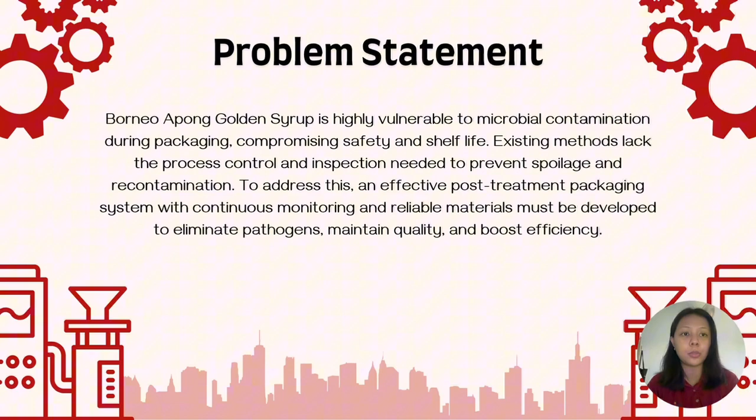Borneo Apong golden syrup is highly vulnerable to microbial contamination during packaging, compromising safety and shelf life. Existing methods lack the process control and inspection needed to prevent spoilage and recontamination. To address this, an effective post-treatment packaging system with continuous monitoring and reliable materials must be developed to eliminate pathogens, maintain quality, and boost efficiency.

Objectives are to design an affordable, practical, semi-automated post-processing system for small-scale production, to ensure consistent operational conditions to reliably eliminate targeted pathogens, to integrate seal quality control to prevent post-process recontamination, and to align the solution with UN Sustainable Development Goal 9.

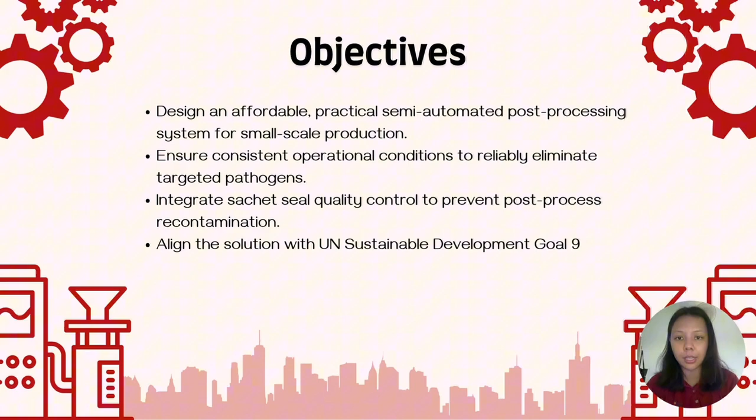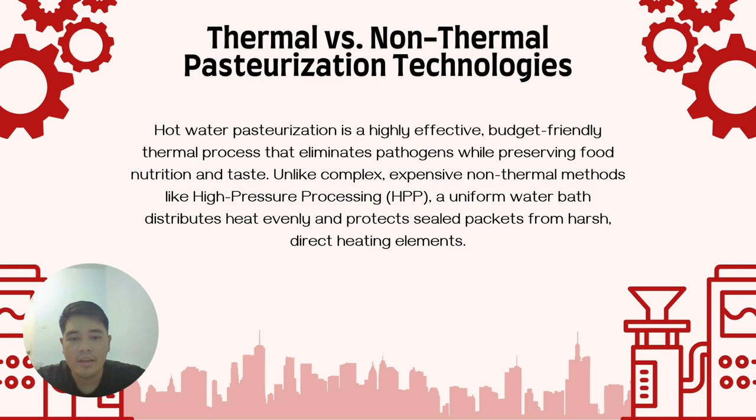For literature review, thermal vs non-thermal pasteurization technologies. Hot water pasteurization is a highly effective, budget-friendly thermal process that eliminates pathogens while preserving food, nutrition, and taste. Unlike complex, expensive non-thermal methods like high-pressure processing (HPP), a uniform water bath distributes heat evenly and protects sealed packets from harsh, direct heating elements.

In terms of microbial contamination and process validation, raw gula apong syrup's low pH 5.6 and high moisture promote dangerous bacterial growth, such as E. coli and coliform. Because temperature readings alone cannot prove complete disinfection, rigorous quality control and sample processing are required to confirm pathogen elimination and validate the system safety standards.

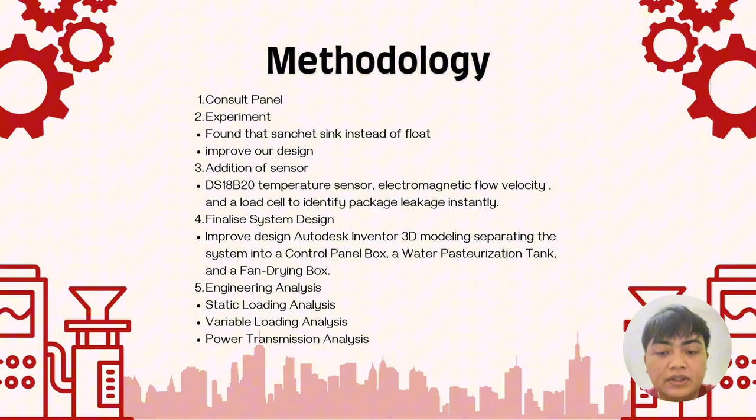Okay, moving on to the methodology, we consulted the panel before improving our design, and we did some experiments and found that the sachet sinks instead of floats. Next, we added more sensors, and then we finalized our 3D design into three main parts: the control panel, pasteurization tank, and drying box. And finally, we conducted an engineering analysis focusing on static load, variable loading, and power transmission.

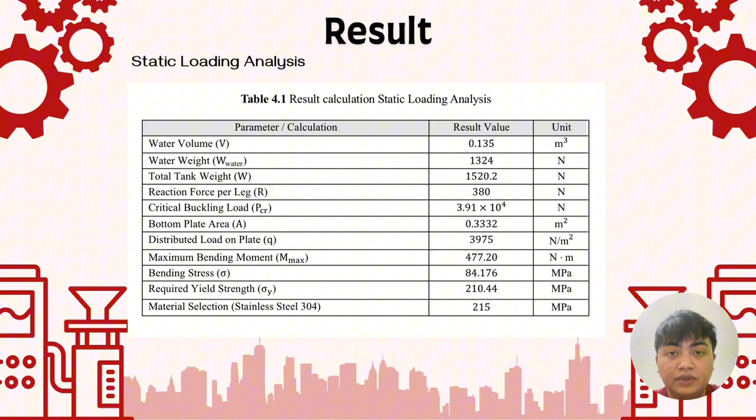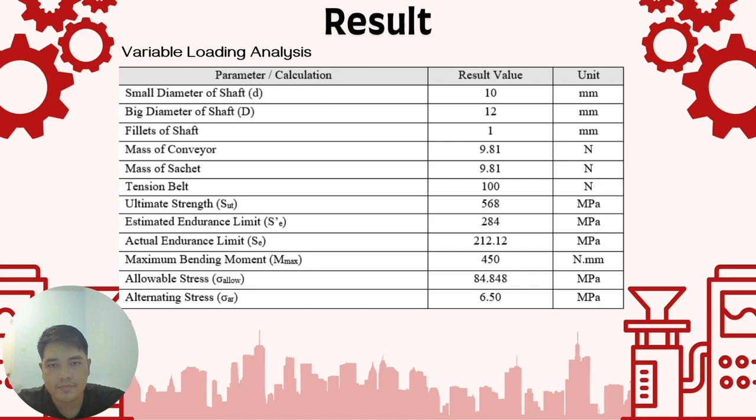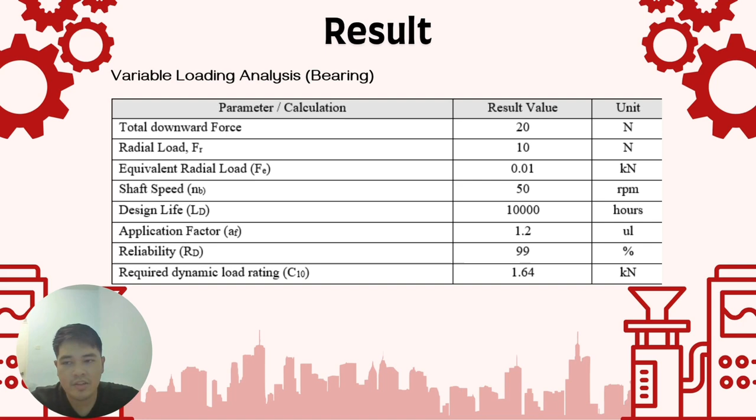For variable loading analysis, we found that the allowable stress is 84.848 megapascal and alternating stress is 6.50 megapascal. This means that the shaft will never fail due to fatigue from cyclic loading. For bearing analysis, we found that the required dynamic load rating is 1.64 kilonewtons. So the selected bearing is the SKF 6200 deep groove ball bearing, where the bore is 10 mm.

In terms of power, our design driving torque is calculated at 0.368 Newton meter. This delivers a net transmission of 0.59 watts, necessitating a minimum power of 1.73 watts. Critically, the gear tooth bending stress remained exceptionally safe at just 1.08 megapascal, ensuring high structural longevity. Finally, our belt tension analysis indicates 9.64 Newton on the tight side and 3.76 Newton on the slack side.

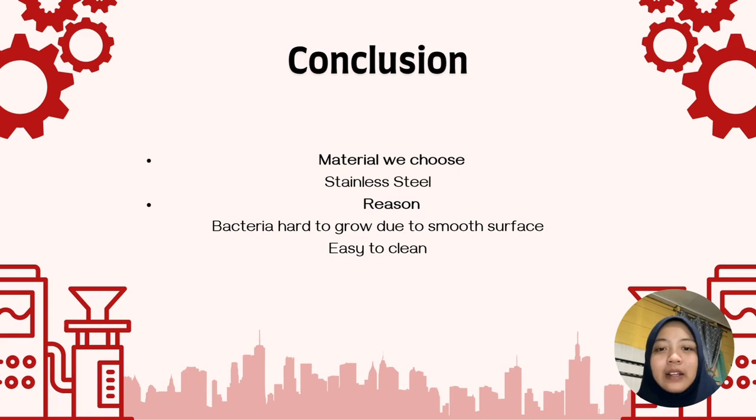We decided to use food grade stainless steel for two simple reasons: strength and safety. While it is strong enough to handle our machine's mechanical power, its biggest benefit is how clean it is. It has a smooth surface where bacteria cannot grow, and it will not rust when washed with harsh cleaning chemicals. By choosing this material, we are making sure our system lasts a long while and keeping consumer safety our number one priority. Thank you.